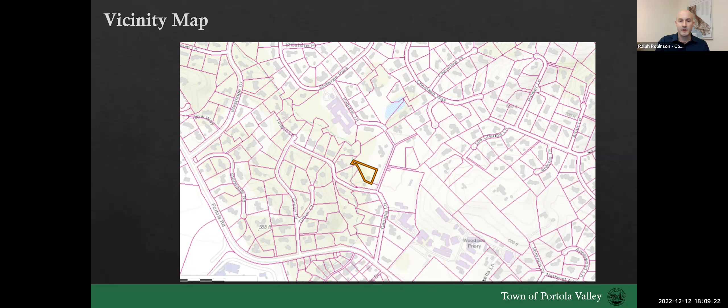The property owner previously completed a lot line adjustment that was approved by the Planning Commission in September of 2021 with their neighbor at 281 Georgia Lane. That created the flagpole portion for access to the lot from Georgia Lane.

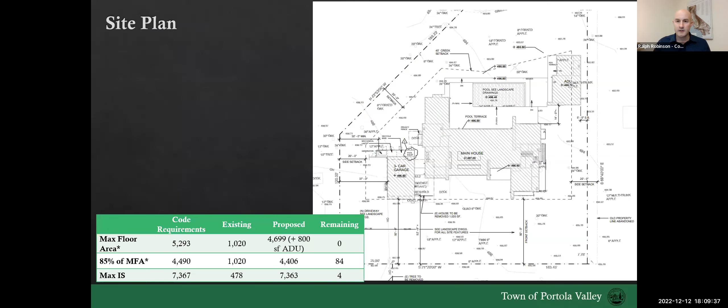So here we see the proposed site plan, which includes the main house, detached garage, pool, and ADU, as we said.

The applicant is taking advantage of the 5% single story bonus for this project, which increases their max available floor area to 5,293 square feet, 85% of which would be 4,490 square feet.

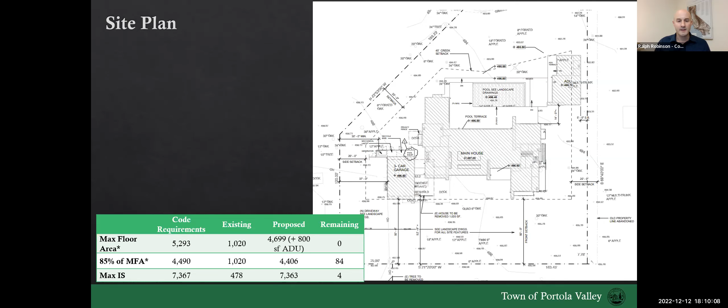Now they're replacing an approximately 1,000 square foot existing residence with a 4,006 square foot main residence with a 1,680 square foot basement, as well as a detached 693 square foot garage.

This brings their total MFA to 4,699 square feet. In addition, with the 800 square foot ADU, that will max out this property for their available floor area.

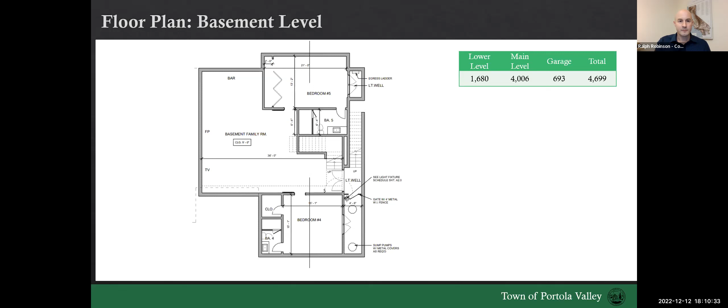So here we see the basement level floor plan, as well as the proposed main level floor plan. Again, this is a single story development, so this constitutes all of the development on the property. You'll see the detached 3-car garage here.

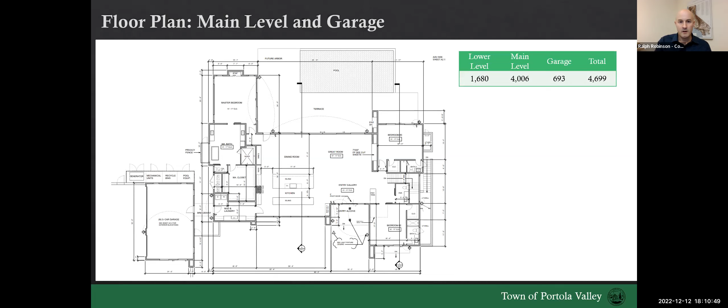The proposed design is going to go right up to that 18 feet, with some vertical projection exceptions for the chimneys, which you can see here.

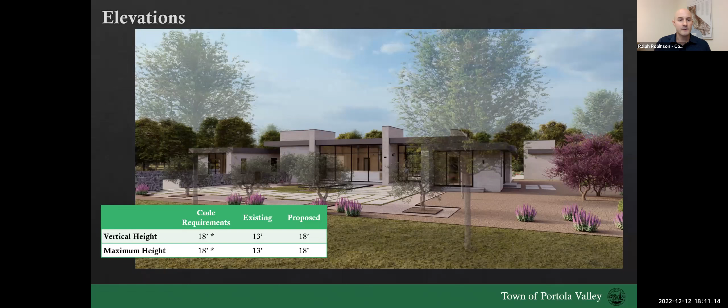And here's the rear portion of the property facing the creek. It's the Corte Madera Creek.

As you can see in the renderings, the proposed materials are primarily this gray wall tile. The LRV for all these materials is consistent with the Portola Valley Municipal Code standards.

Now, Megan, I believe you brought up at the field meeting whether we have a physical sample of this available. So we do not collect the physical sample with the ASCC application. However, if there are any concerns about the lightness of this wall tile, we could condition that as part of the building permit.

If they submit that physical sample, we would confirm that LRV value again, just to confirm it's not as light as maybe it shows up in the rendering.

We see the black trim here for the windows and doors, as well as this lighter color for the roof and edge trim.

Quickly on this too, it's a flat roof. The applicant is also planning to install solar as part of this project, so that was the motivation for the flat roof there.

So for impervious surfaces, we're going up close to our maximum impervious surface area of 7,367 square feet.

Much of this is to accommodate the porch, patio, and walk areas, which you can all see shaded in here around the residence.

There's also about 3,000 square feet of driveway, which is exempt once we get 100 feet from the corner of the residence here, as well as some limited area for geo block, so partially impervious guest parking area.

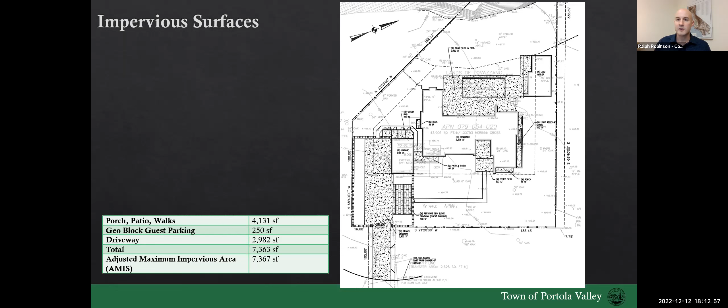For landscaping totals, the water use is within their MAWA maximums, so 78%, as you can see here. Native species are primarily used here, and drought tolerant species.

You can see we have 17 new trees in all being planted here, 10 of which are the non-fruit bearing olive variety and 7 western redbuds.

Now, looking at the planting plans themselves, here you can see the front lawn planting. We have the driveway on the left, and then we have the new olive species being planted in the front here, with a few of those redbuds along the right side.

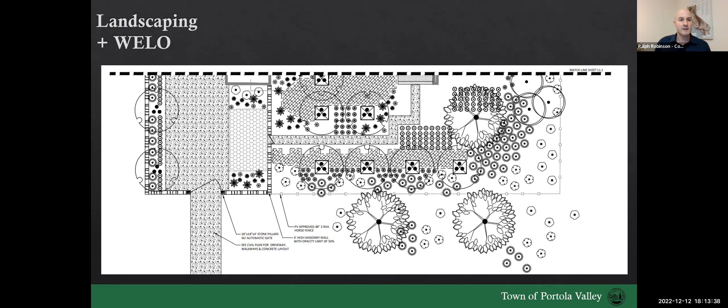And then we have the rear planting plan. We have some native mixes in the rear leading up to the creek. The existing trees you can see here as well.

One item for additional consideration, maybe worth a condition within the conditions of approval, is outlined here in that red circle. That's a line of Portugal laurel, which was discouraged by the Conservation Committee in their comments. It was kept in as part of the landscaping plan, but since that was the only outstanding comment on that plan, we decided to move ahead to the ASCC meeting. We did bring this up during our field meeting, and the applicant communicated his willingness to change that species and the orientation of those plantings to be less linear, but I'll let them speak to that more in their comments. The commission may wish to condition the project on changing this species again, as it's a non-approved species for Portola Valley.

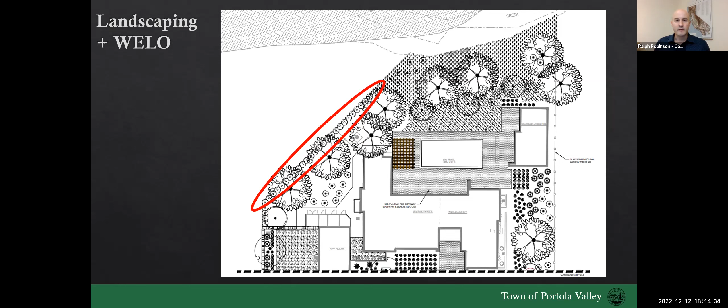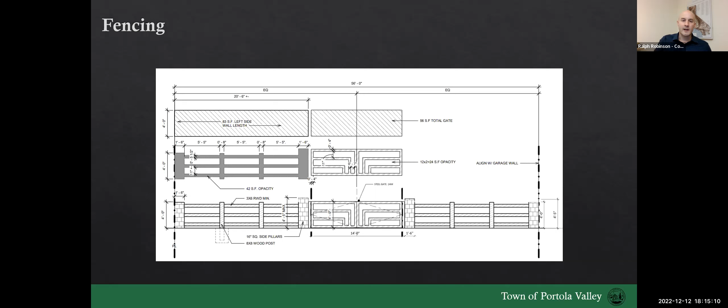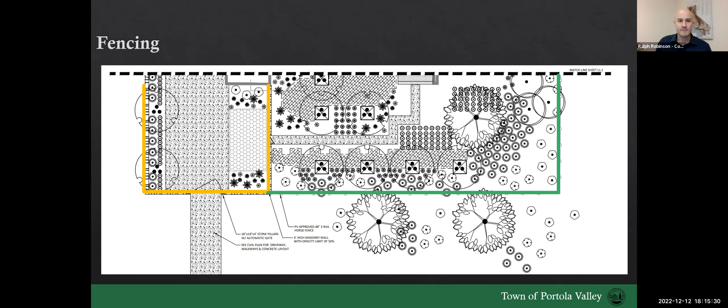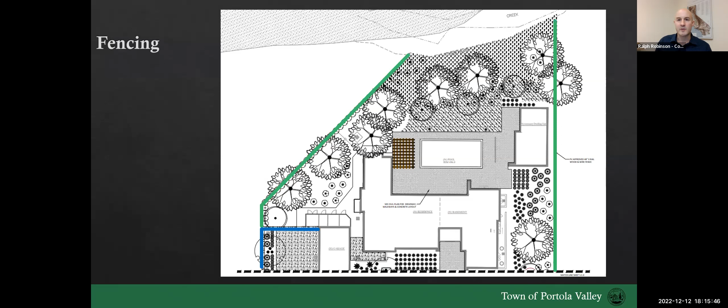We also have some fencing proposed, including a front gate at the front of the driveway. Here you can see the design of the gate. This went back and forth with staff a couple times to ensure the height of this gate and fence, as well as the required opacity, met the 50% requirement for gates and fences in the front yard. We also have a section of the driveway enclosed by this wall, shown on the top left as a pretty straightforward masonry wall. A lot of the other properties also have a horse fence around the rest of it, so you can see this 4-foot tall 3-rail horse fence outlined in green along the front of the property. In orange is our swinging front gate, as well as our wood post fence along the front portion of the parking area. Continuing in the back, that transitions to a masonry wall, and again this 4-foot wood horse fence extends to the rear of the property, but not along the portion abutting the creek itself.

As part of the project, we have 3 significant tree removals, labeled here. These are all coast live oaks for reference. The first, tree number 2, is removed to accommodate the driveway itself. The second, tree number 3, is in the area where the main house is being constructed. Tree number 5, also a coast live oak in the rear, is being removed because the roots are thought to interfere with the construction of the pool and ADU, to mitigate any potential adverse impacts from the tree on those structures.

It was observed at the field meeting that there was some kind of nest in tree number 5. Commissioner Wilson thought it may have been perhaps a dusky-footed wood rat, assuming I'm saying that correctly. That's something we could condition, as far as having it inspected and relocated if necessary, presuming it's not a squirrel nest. It could be included in the conditions of approval. I wanted to bring it up again, as it was a subject of conversation during the field meeting.

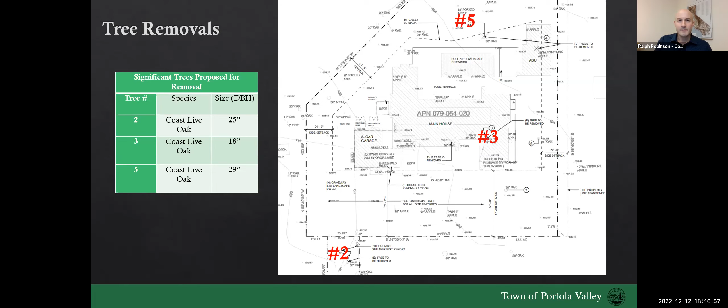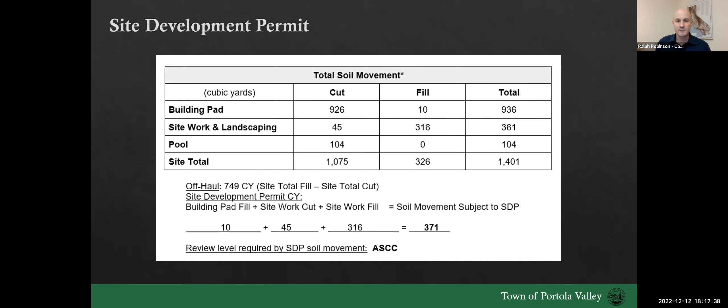Now, the site development permit is subject to ASCC review. Here we can see the total soil movement proposed, much of the cut for the building pad itself, as well as some for the pool. Those figures are not subject to ASCC review, but we do have some amount of fill in the site work as part of this project - altogether 371 cubic yards - up for your review here. The site itself is relatively flat, so nothing too dramatic as far as the excavation work, other than cutting out what's needed for the building and the basement. But we are bringing it up here as part of our requirements and process.

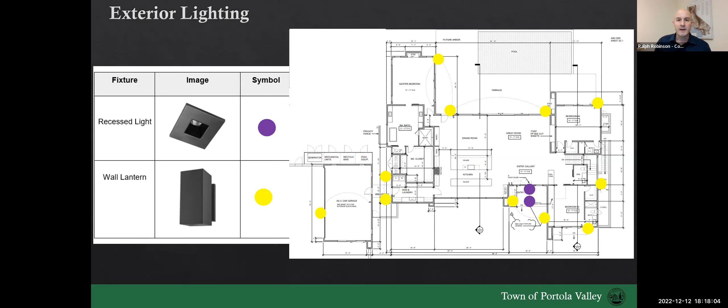Exterior lighting is limited to the yellow fixture wall lanterns, those shielded wall lanterns at the doorways, and then we have 2 other recessed lights at the front entryway. Otherwise, we don't have path lighting, landscape lighting, or certainly no uplighting of trees, bushes, anything like that. So overall, a limited amount of outdoor lighting, and all fixtures comply with town requirements for output.

There was a public notice mailed to all property owners within a 300-foot radius. Excuse me, that should read December 2nd, not December 12th. At this point, we've received no public comments prior to this meeting, prior to the packet, or this evening.

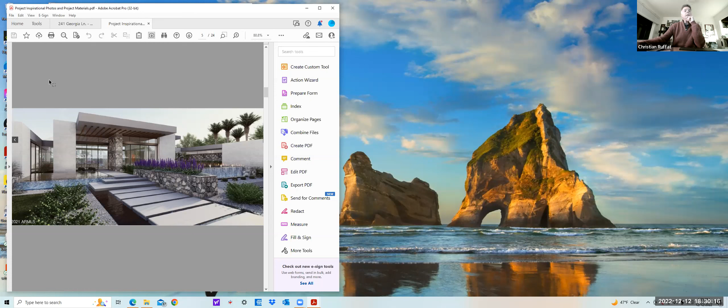So this is another photo of that house in Spain, and this is an additional one. We wanted to have big expanses of glass, or as large as we could get. This is another project where we finally tuned it down to a different approach using this wall tile, fine-tuning our design a little more. This is just another idea for the horizontal vertical elements incorporating the wall tile scenario, and another picture of the house.

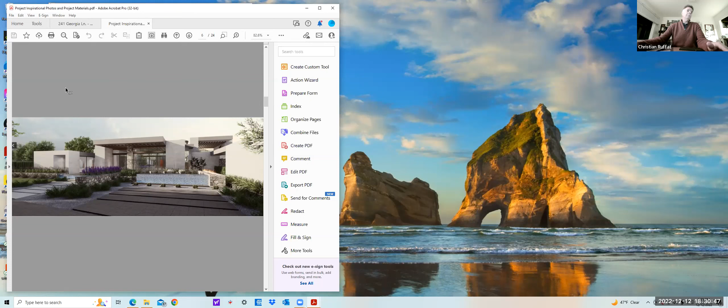So we're trying to replicate this style of house, and we felt that our site really lent itself well to doing that, given the constraints of the 18-foot max roof. We were hopeful that we could at least have these vertical elements protruding above the roof line.

And then for glass, if there's a question on glass, we're hoping to use a Solarban 60 product or something similar, because I know there was a requirement in Portola Valley for a specific kind of glass. So this is our answer to that.

That's basically it in terms of specific inspiration of elements. I can answer any other additional questions as they come up, but I'll just bring it back to the commission. Great, thank you.